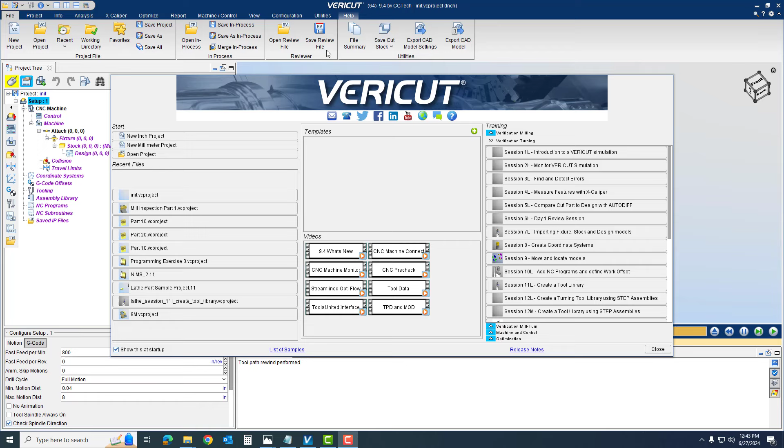So when I first open up Vericut, I'm going to come up to my welcome screen. If you ever need to get to the welcome screen after you open it, you just come up here to your help tab. We're going to go ahead and start with a new inch project. And then we're going to start kind of like what we did in the last video. If you've already watched it, we're going to install our controls, our machine. We're going to go into our attachments. We're going to install a fixturing. We're also going to install our stock and our design, so our part model.

We'll go ahead and do our coordinate systems. We'll add the G code. I'll show you how we're going to introduce a master tool list, how to grab tools from that master tool list. And then finally, we'll go over the NC program. So let's go ahead and go to control. I'm going to show you different ways to do this as we go along. After I click it, I can click on the browse folder and you'll see me go to my desktop.

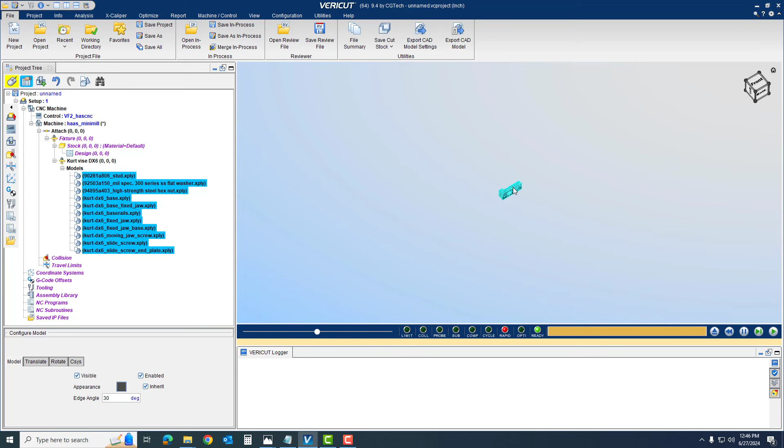Now when it first comes in, notice my orientation. When I first turned on my Vericut project, it's already in a certain orientation. When the models were saved by the designer, they were saved at a different orientation. It just doesn't matter, okay? So what I want to focus on first is getting this to the same orientation as what my machine is located in, because I want my spindle to come down on top of my part.

I don't want it trying to come up through the bottom of the part. So do not try to manually rotate this with your mouse. We're going to actually go into Kurt vise. We're going to rotate it. I'm going to change this to 90. And then I'm going to just try to get it to the right way.

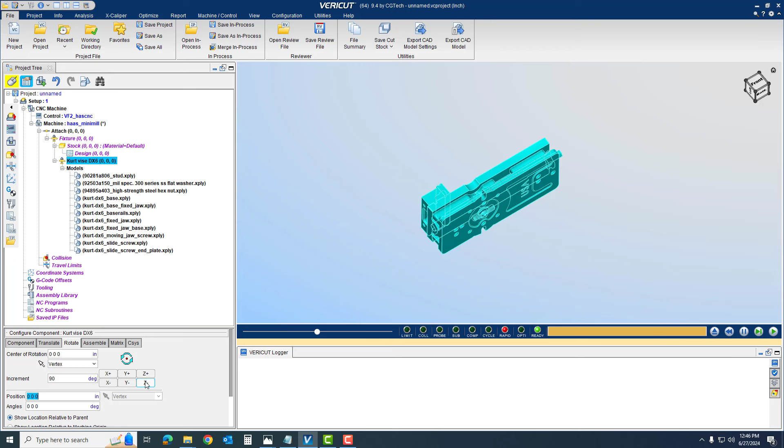So that looked good, and that looked good. So you'll notice the orientation looks just like this right here. Okay, so if I was looking straight down on top of it, that's what I would want right there. So I'm going to click off of it, and I'm going to go ahead and minimize. That was probably half the battle right there with our fixturing.

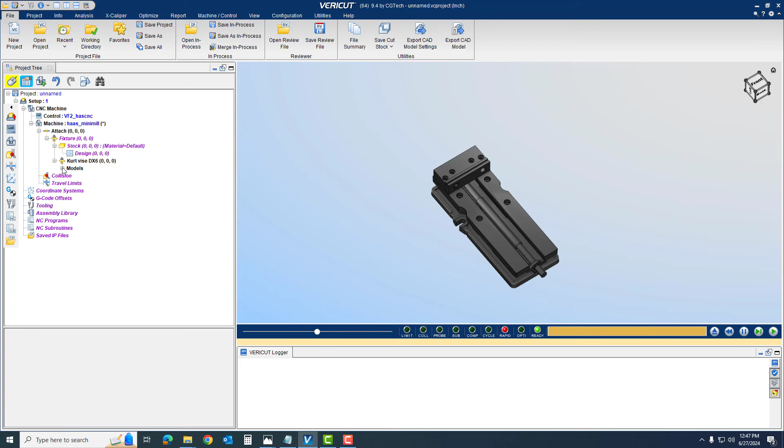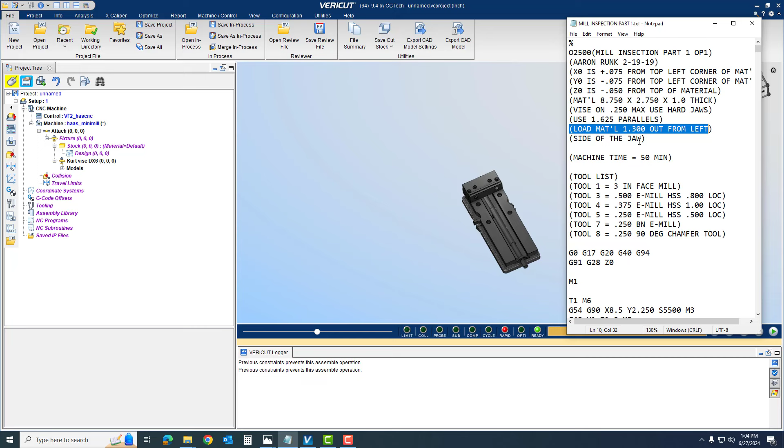So now we're going to come up and we're going to make our stock, but before we do that, let's come up here and see what we're going to be making. So my material is going to be 8 3/4 by 2 3/4 by 1 inch thick. We're also going to vise onto a 1/4 inch max with our hard jaws, and we need the material to be hanging out of the left side of the vise 1.300. So we're going to go ahead and do that right now.

So I'm going to click on stock. I'm going to go to component. I'm going to come down here to model, and I'm going to click on block. Now when this comes up, it's just going to put some material right there in the middle. I'm going to go 8 3/4, and I can hit tab or I can click on the next line, whichever one you prefer. I'm going to hit 2 3/4, tab, and then it's already set to 1 inch, and I can hit enter or whatever I need to do.

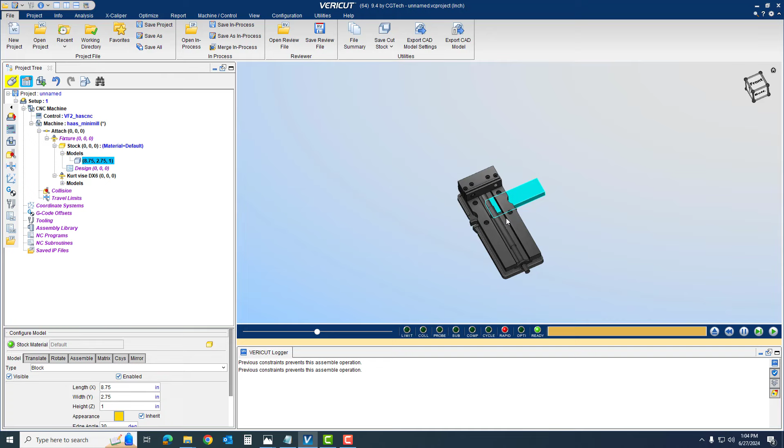So now that is actually right where we need it to be orientation wise, so we don't need to rotate our material. The next thing we're going to do is we're going to use the assemble function to kind of mate it against the right surfaces, but we need to kind of move it close. I find it's a little bit more helpful to do that. So in translate, I'm going to go 5 inches. I want to go up 5 inches.

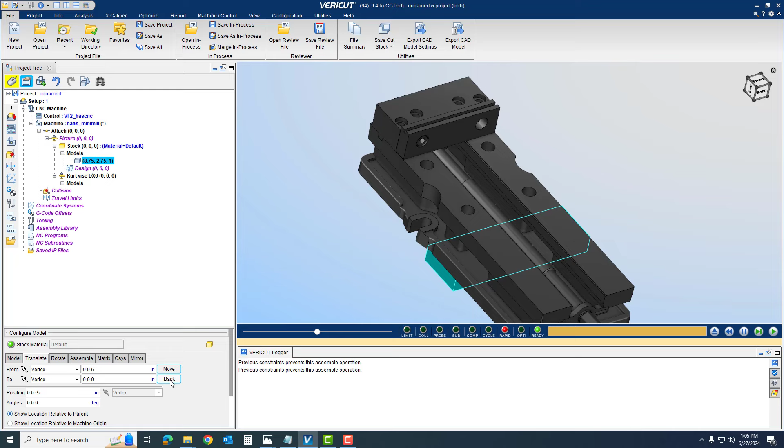So I'm going to hit move, but if you'll notice, it went the wrong way. So if it does this to you, you can simply hit back, and then we're actually going to move it minus. So the way Vericut is incorporating this, it's thinking that's moving in a plus value. It gets kind of backwards. You can't always get it right the first time, but that's okay. That's why that move back or reset is right there.

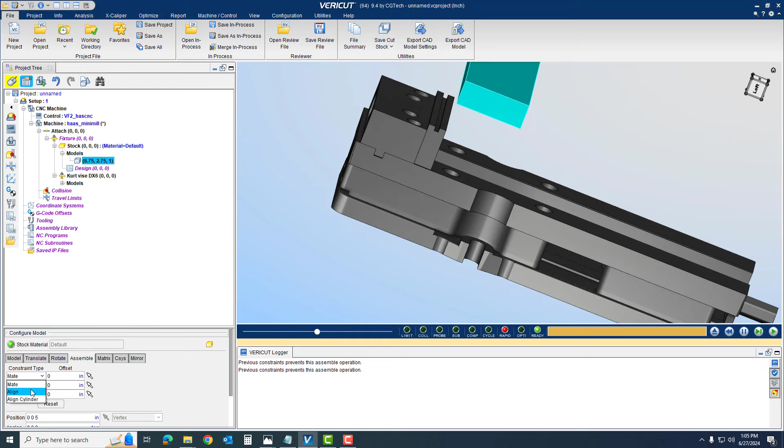So now we're going to go into the assemble function of this, and we're going to keep this in the mate. We have different constraint types. We'll use align here in a little bit, but we're going to go with the first one, and we're going to simply work on getting the bottom mated to the top, and then we're going to lower it a minus 250 thousandths. And I want to hit enter. I want to watch it. You can see it did go the right direction. So that worked out pretty good.

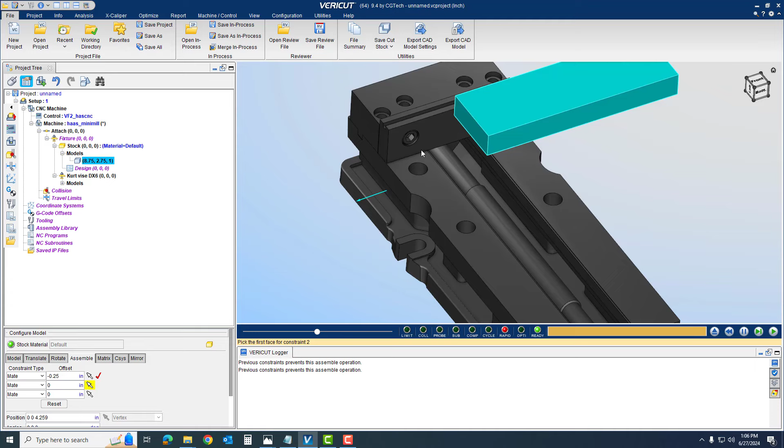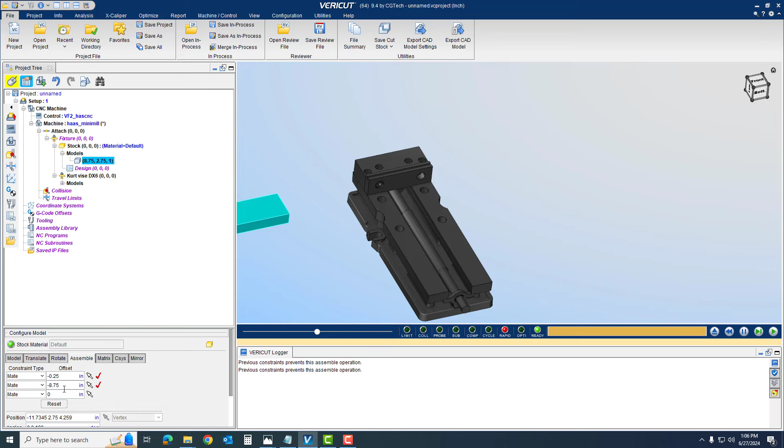So next we'll go ahead and hang it out 1 inch 300 thousandths. But when I mated it, it kind of flipped it. It's kind of annoying, but it's not a big deal. So to fix it, I know my material was 8 inches 750 thousandths. And if I hit enter, it moved it, but it went the wrong way. So I'm actually going to put it in a minus and hit enter. And you'll notice that it did go the correct direction, but it's flush.

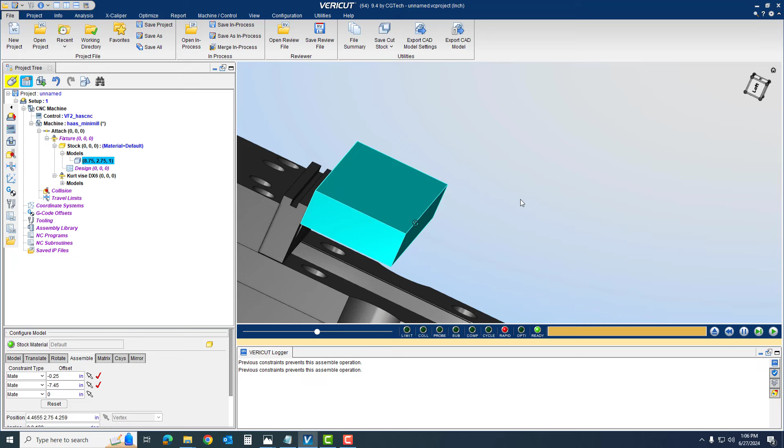So I'm going to let this software do the math for me. So I'm going to type in plus 1.3 and hit enter. So it was actually a shift of 7 inches 450 thousandths in the negative. So that looks pretty good. The last thing I got to do is I got to get it flush with my jaws. So I'll come here to the last one, click on that surface, click on the face, and everything looks really good. So right here, I have my part positioned in the correct location. I am now ready to add my moving jaw so that we can get it to clamp on my material.

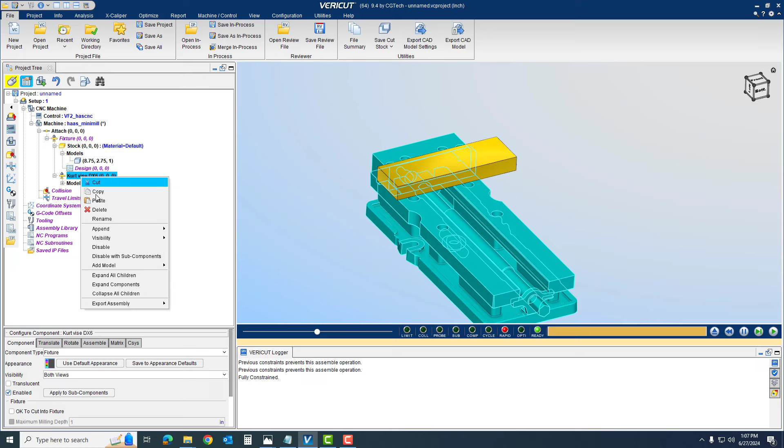So I'm going to come down to here. I'm going to right click on the Kurt vise. I'm going to go to append, and I'm going to put another fixture that carries the same alignment as this one, so that way there's no aligning once you get it in there. So I'm going to rename this as movable jaw, hit enter.

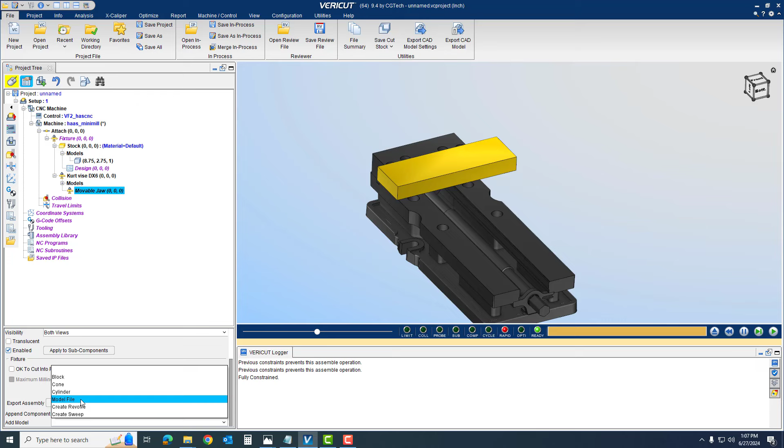I'll come down here to the model, and I'm going to go from model file, and then I'll do the same thing. I'll come back to my Vericut. I'll go to my Kurt vise, and this time I'm going to get my movable models. I'm going to do the same thing. I'm going to grab these XPLYs right here, and I'm simply going to hit OK.

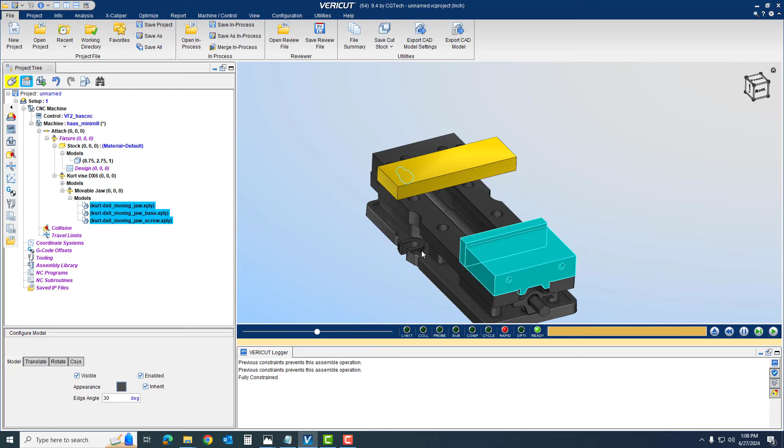So you'll notice it kind of brought an extra screw in there, which is kind of odd. It's all right though. It's not a big deal. And I'm going to go ahead and click on that one screw because I don't need it, and I can just delete it right there.

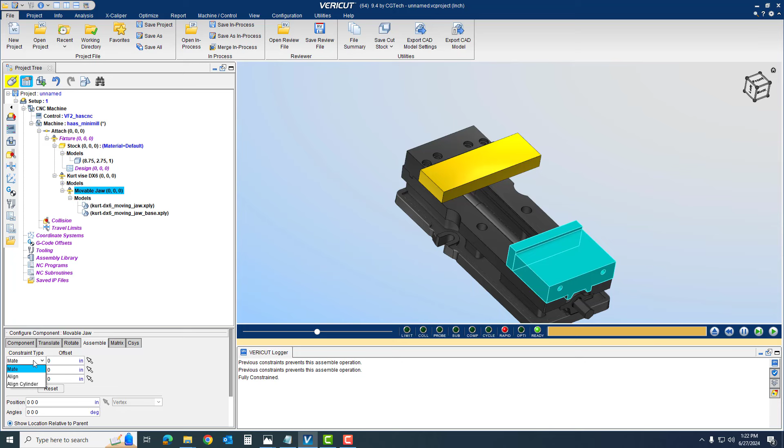So now let's go ahead and get this movable jaw flush with my material. I will click on moving jaw. I will go to assemble. I could go to align, but we've done mate so far, so let's go ahead and do that. I'll click on the arrow. I will click on that surface. I will click on that surface, and if I click out anywhere out here in space, it just takes it off from being highlighted. So this is really cool.

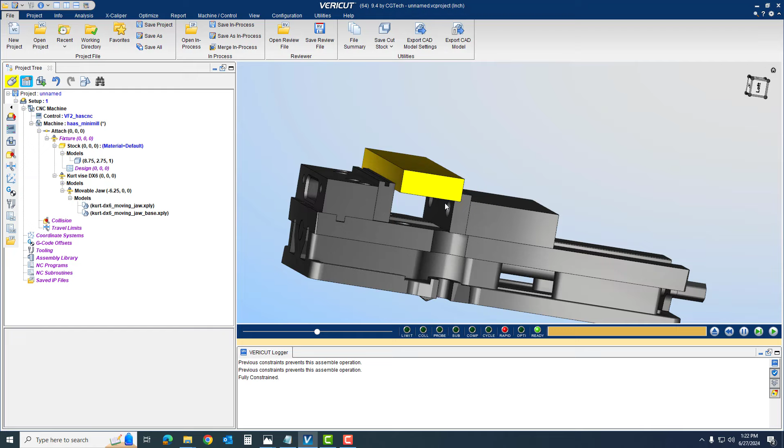So I have everything. If you wanted to, you could build in some parallels right here. Just kind of give you a more realistic idea, but this is just keeping it pretty basic. The next thing that I think everyone's going to like, this pretty cool little customization, is maybe I don't like the color of the vise right here. Maybe I want to look a little more realistic.

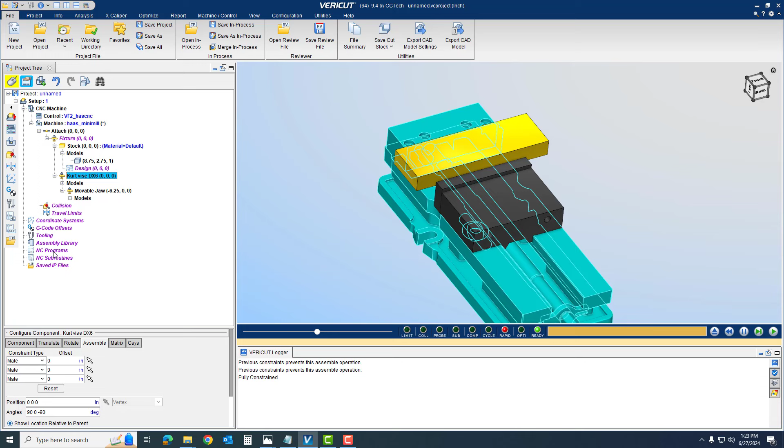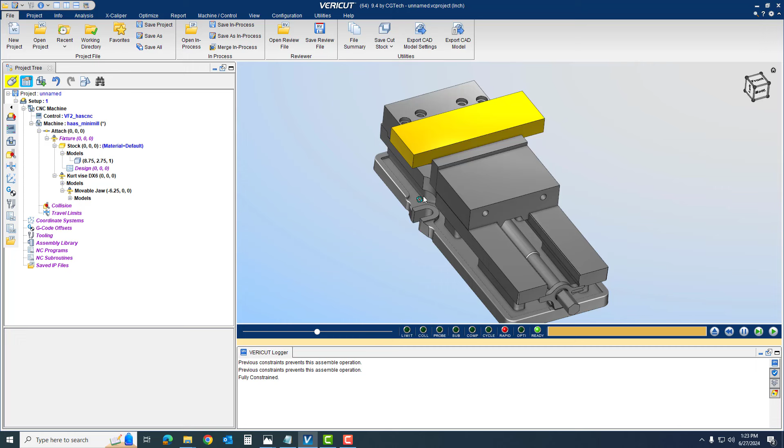So what I'll do is I'll come down here to component, and I can go to appearances, and let's change it to something a little bit more realistic on the steel scale of it. And then I'll hit OK, and let's say this moving jaw, let's make it match. So we'll go to the same thing, hit OK. If I wanted to, I could grab that bolt, and like I said, I want to change just that one color of that bolt.

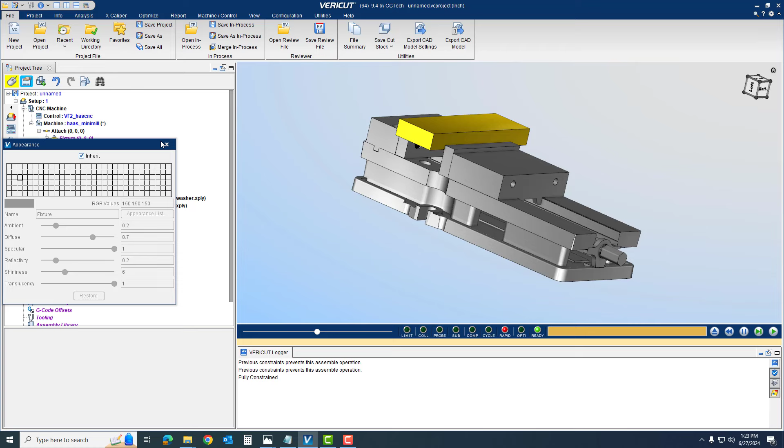I could also go to model, it has an inherited color, so I'm going to click that off and we'll just make it a darker color. See it right there. And then if you know what vises look like, this bottom area is going to be blue. So I just kind of exited my box right there and I clicked on that. Same thing, click off inherit, and then I'll go to blue right here, and then I click off of there.

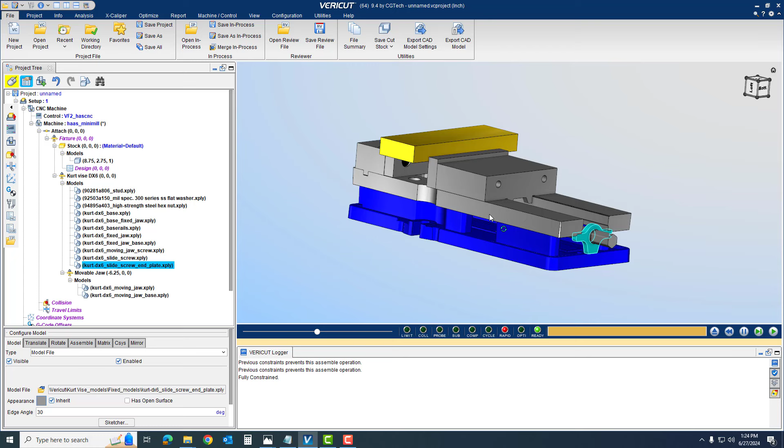So it's really cool. You can customize this. You can change every single component of this vise to a different color if you'd like. It's just whatever you feel comfortable with doing. So now let's go ahead and get rid of our vises right here. Let's just minimize our drop down menu. Now it's going to be very similar to how we did our last video.

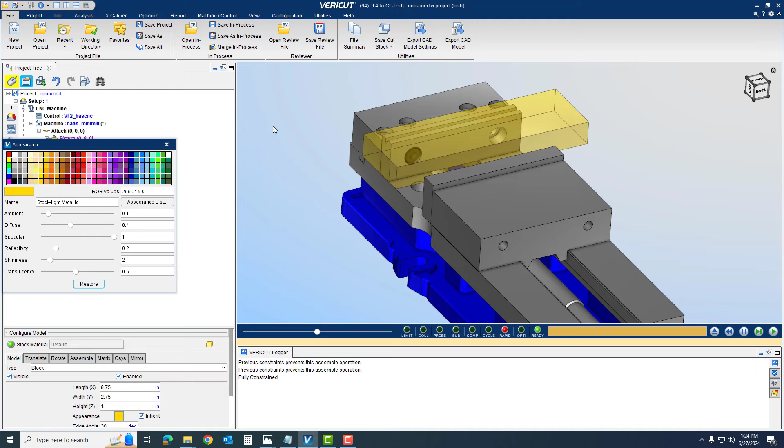I'm going to click on my material. I'm going to go to the appearance of it, and I'm going to make it a little bit translucent, so 0.5, and hit enter, because when I bring in my model I want to see everything. So I'll exit that. So now is when I'm going to go to my model and my design. Now when you click on design, it's going to come up as invisible. So you want to make sure it's visible in both views.

We're going to go into adding a model file. And I'll go ahead and again, this is where my model file is at. So I had a stock, so you could bring in a stock and then position it, but the block worked out just as well. So here's my model. I got it as a .x_t. You can do a SolidWorks part.

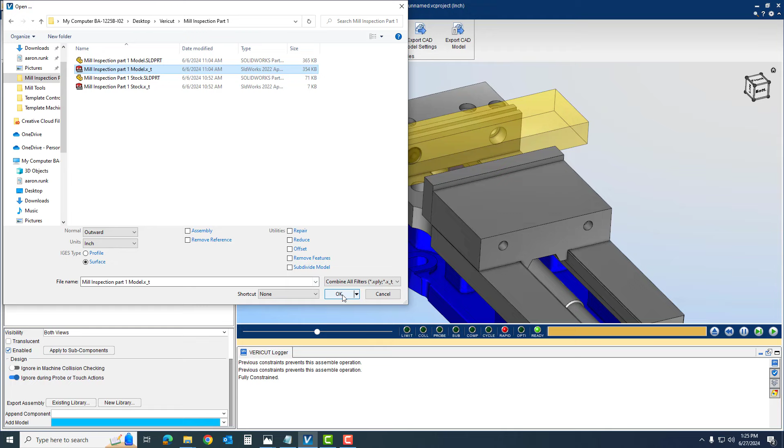Sometimes the SolidWorks, if you have it and the license with Vericut, don't seem to make that handshake. So I'm going to go ahead and use a .x_t or a Parasolid. I'm going to hit OK, and it's going to bring it in pretty much in the same location it brought the material in. And I'm going to follow kind of the same pattern I did before.

I'm going to go ahead and translate it up. And then I'm going to go to Assemble. And here's where I'm going to go over the aligning. So I'm going to change all these to align. There's not a lot of difference with the mates, but I'm going to go ahead and change them to align.

Now I want to look at my information here. Now it says XY0 is 75 from the top left corner, and then X and minus 75. Now here's what's kind of tricky. You have to take your time on this. Now if you look right here, when I went into my CAM software, my XY0 for my coordinate system is the top left corner. Now I moved my model in from that corner 87 thousandths and 50 thousandths right here.

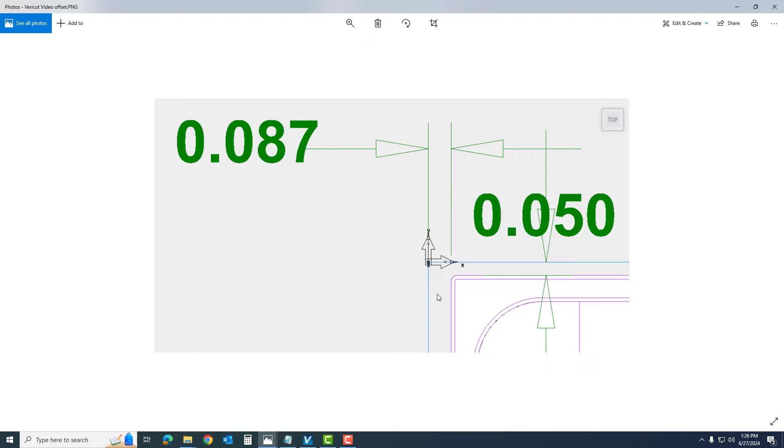So that is what I'm going to be moving my material from that corner. So we're going to align it with that corner, and then we're going to move it over and over. Now it is flush with the top, so I'm actually going to have to move it down into the part for that. Now that's going to take a little bit to sink in. It really depends on how you make it in your CAM software, but let's go ahead and do that right now. So that 75 thousandths that we were looking at, that's not going to have anything to do with how we're modeling it right now.

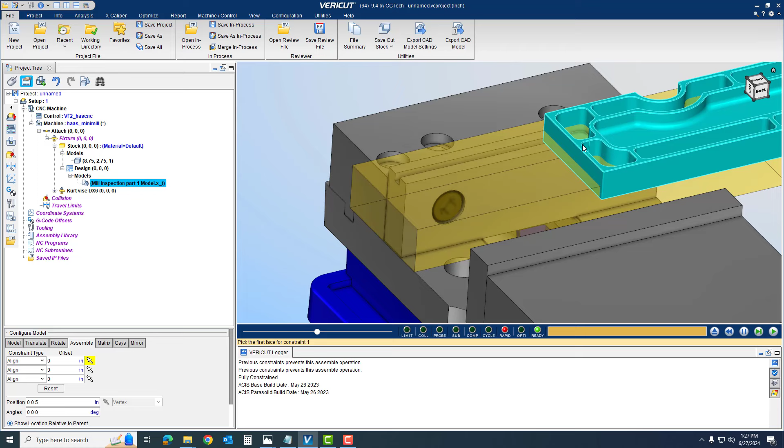So let's go ahead and do our first aligning. We'll go ahead and grab this and move it to there. And then again, it was 87 thousandths. So 0.087. If I hit enter, hey, it went the wrong way. So I'm going to go ahead and put that as a minus and hit enter. And you see that it does go the correct direction.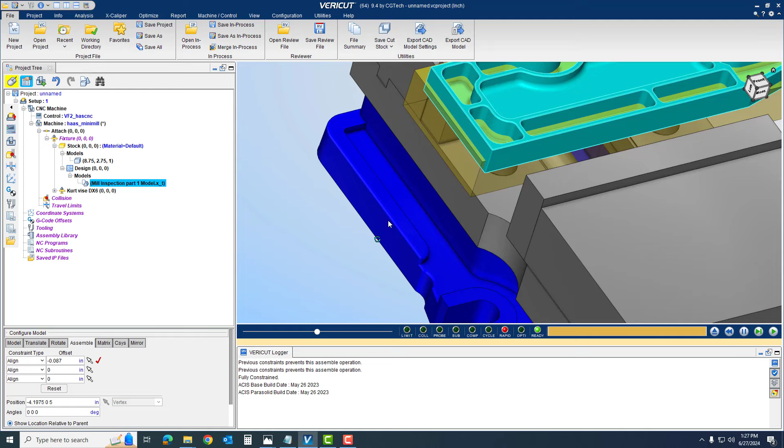And now I'll go ahead and I'll click for my other side, which will be this side of the part to this side of the stock, and then we'll put a minus 50 thousandths in here, see if it goes the right direction. It did. Kind of hard to see. If you need to, you can rotate it to see that it is going into the material.

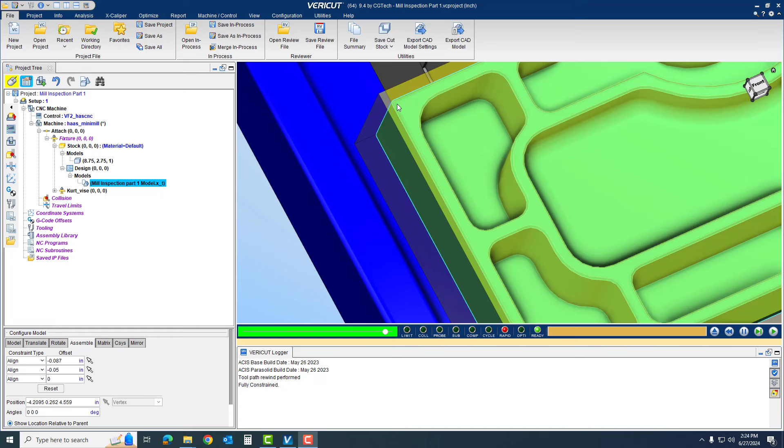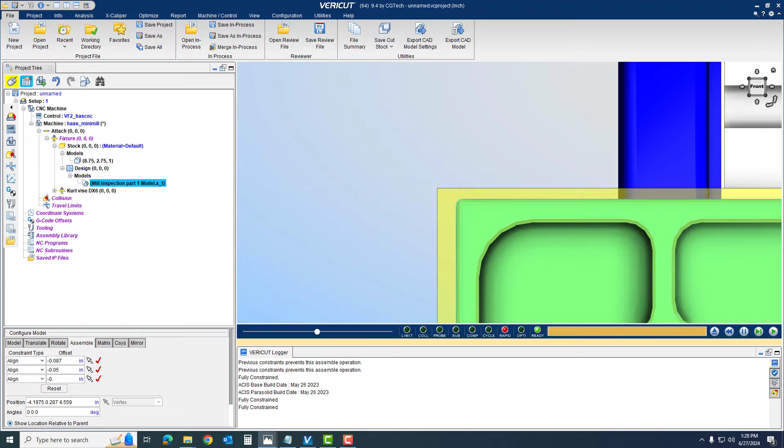And then the last one, we'll click the top of our part, top of our stock. Now I'm not going to move this down 50 thousandths because whenever I made my CAM software, I kept this flush with the top of the stock. So now we went through the aligning constraint type for positioning our part so that, if I go top, you can hold the middle mouse and you can zoom on stuff. So if I bring in this image, you can see that it does look very similar to that. And that's what we want.

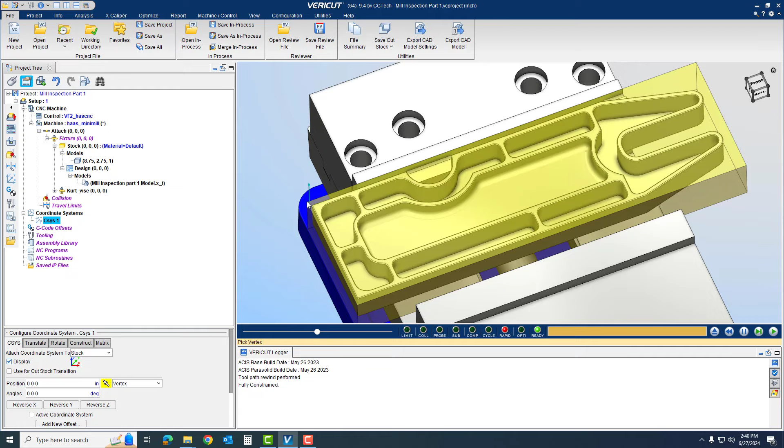So from here, I'm going to go ahead and add my coordinate system. I'm going to zoom out a little bit so it's easier to see. Click on my home button. I'm going to get rid of all that ladder so it makes it a little bit cleaner over here. Now remember, in my image right here, my CSYS is the corner, so I'm going to keep that in the corner. So I'm going to add a new CSYS, and it's pretty easy. I'm going to click a vertex, and I'll click this corner. I'll zoom up a little bit.

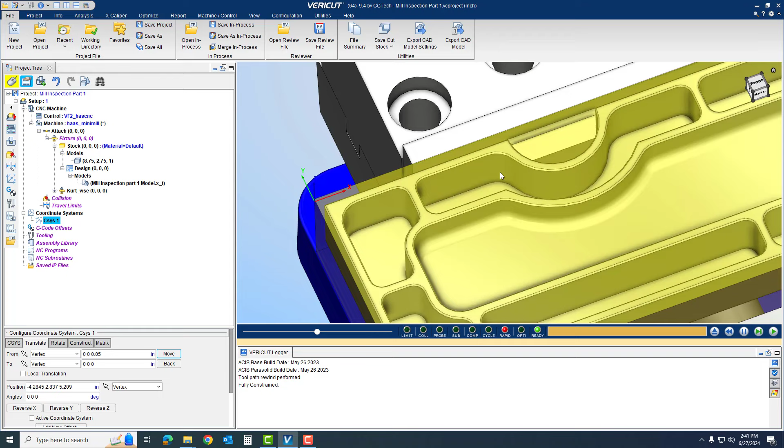Now remember, in my CAM software, I moved the model into the part, but I kept the face of the part flush with the stock. So in here, I will need to lower this 50 thousandths. Now see, it did go the opposite way, so I'm going to move it back. I'll take out that minus and I'll move it down. That way Z0 will cut at the top of this face. And then I'll simply just click off of it.

But now my program uses a work offset of G54. So we're going to call this 54. And then I'm going to go off the CSYS location number 1. And then I'm simply going to click add. So now I have a coordinate system right there. So that was really easy.

Now the next part is we're going to add the tooling. Now I'm going to spend a little bit of time on here because this is where you're going to have a lot of questions.

So I'm going to double click and bring up my tool library now. In my last video, we went through and built every single tool.

I don't want to do that because if you'll see here, I've got a face mill, several end mills, ball noses, and a chamfer tool. Now what's interesting is these 4 tools, one's a 1/2 inch, one's a 3/8, this is a 1/4 inch, and that's a 1/4 inch. But in my tool inventory, all of these tools have 3/8 shanks. Very interesting, but that's how I have it.

So I can actually use the same tool holder for all 4 of these. I'll only be grabbing a face mill, 4 of these style holders, and 1 1/4 inch holder. That's going to make it a lot easier, especially because we have access to a master.

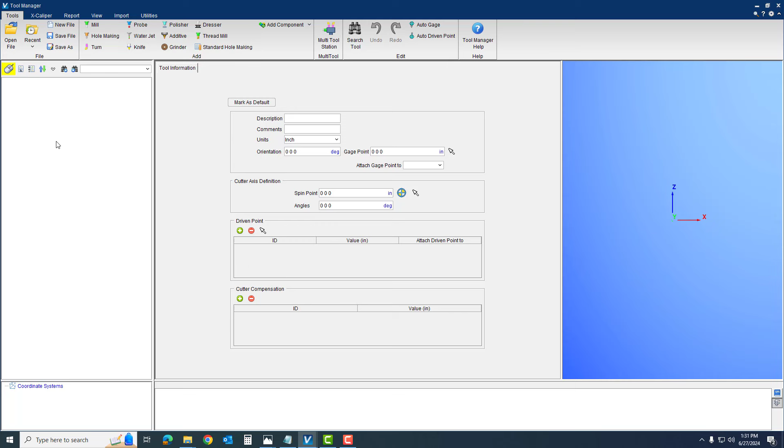Let's go ahead and minimize that. Right here, I'm simply going to right click and search for tool. I'm going to go into this looking for browse, and then I have mill tools, which I'll include in the description below. I'm simply going to click on it.

So now it comes up with this master tool list that I've already made. I'll kind of move this over so you can see. Now this is the brand. This is a Cat 40. I have some BT30s in there for different style machines. I have a mild description of what's in these holders.

Now you can build your holder library without adding a tool. I just happen to add the tool in there so you can get an idea. This is a Cat 40 holder. It's got a 2.5 inch gauge length and it can hold a 3/8 shank. So in the picture here you can see it has a 1/2 inch tool with a 3/8 shank.

So I'm actually going to need 4 of these. I'm also going to need a face mill, which has been designed already down here, and we can go in there and change this diameter if we need to. I'm also going to need this 1/4 inch, which by default had a 90-degree chamfer tool. I got kind of lucky there.

So let's do this in order. I want that face mill. I'm going to simply click duplicate. And if you'll notice up here, it brought that tool into my new library.

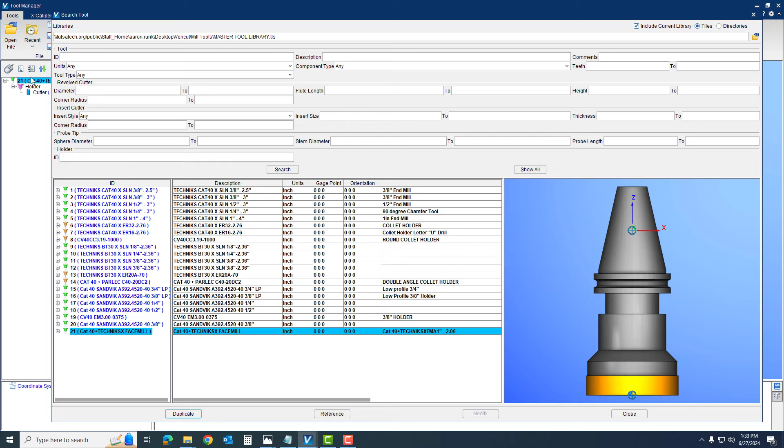So let's come up here to this tool right here. Like I said, these are the same things. One's a 2.5 inch, one's a 3 inch. So maybe I want that extra clearance right there. So I'm going to grab 4 of these - 1, 2, 3, and 4.

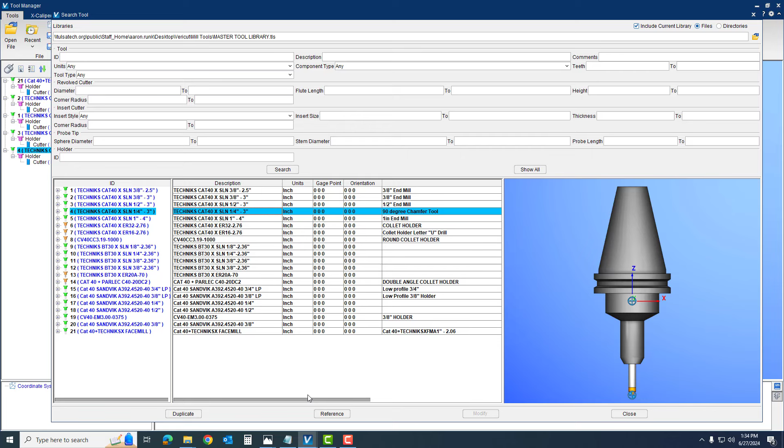We'll grab our 1/4 inch and we'll duplicate that as well. We are now done with this right here, so I'm simply going to close it. And there's a lot going on right here.

So the first thing I'm going to do is minimize this so we can take our time right here. I'm going to spend a little bit of time on this. If you're already familiar with how to do this process, you can skip ahead. But I want to make sure for those that do not understand how to do this part that I cover some of the basics when it comes to doing this.

So let's start off with our face mill. The first thing I want to do is rename all these tools. Now, sometimes with the renaming, I'm just right-clicking, renaming, and hitting enter after I rename it. I'll show you why, because it can get real frustrating whenever you're doing it and you have multiple tools with the same name. This really helps me navigate this a little bit better.

So let's start with the first tool. It is a 3/8 or 3 inch face mill. So if I come up to here, it's tool number 1. So I'm going to right click, hit 1, enter.

Also very important, as soon as I do that, this has to be a 1 as well. Think of this as your H and that is your T. So your T and your H have to match or your simulation will not work. So if I drop down to the holder, you'll see that I've created a DXF.

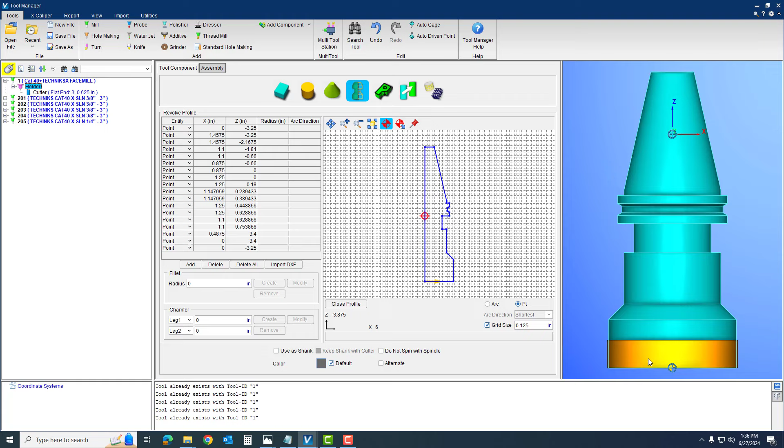Now there are ways of building inserts. I actually went the simpler route. I went to the cutter and just made a really fat end mill. So that's a 3-inch end mill right there. You can put a radius on there, but it is a flat 90-degree surface. Works out just fine for what I'm doing because I'm facing.

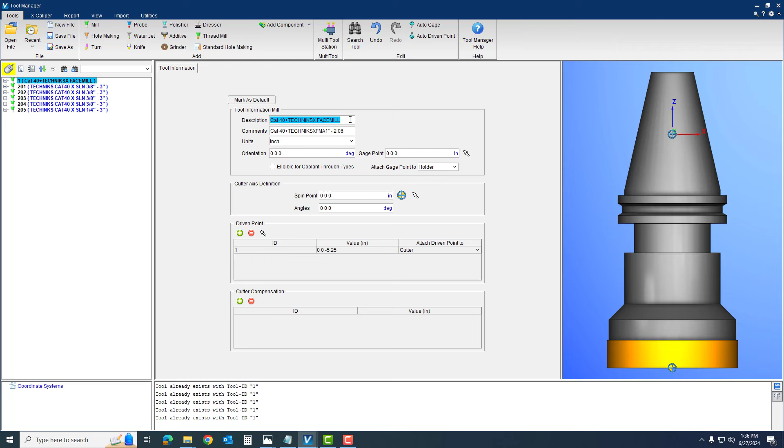So that tool's done. And if you wanted to, you could change your descriptions to whatever you wanted to. And when you're done, always hit enter and it will save it over here.

So tool number 2, if I come up to here, is going to actually be tool 3, a 1/2-inch end mill with 800 thousandths length of cut. So I will simply come up to here, right click and rename to tool number 3. I'll hit enter, come down to here, hit 3, hit enter. If you don't hit enter, it won't always save it.

Let's come to that cutter. You can see it's a 1/2 inch. It's got the 3/8 shank, and it's already at 850 thousandths. But let's change that. Let's take off that 50 thousandths and hit enter. Let's look over here - see, it just made it a little bit shorter. That's all it is right there, is change that right there.

So let's go ahead and close that one, and let's just keep going. So I got the next one. It is tool number 4. It's going to be a 3/8 with a 1-inch length of cut.

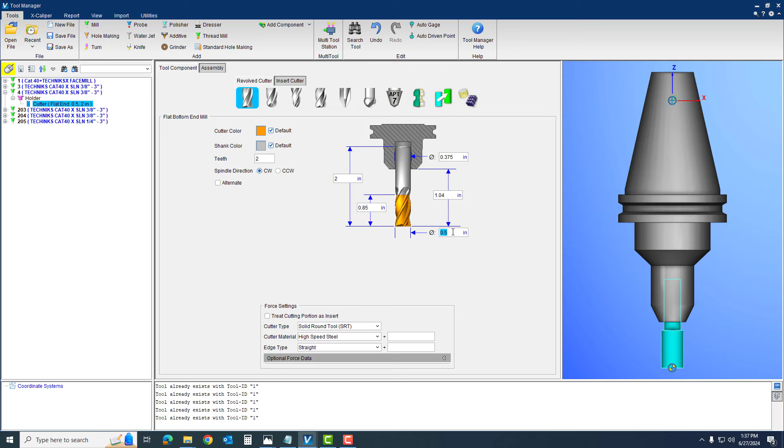So let's come here. We'll rename it to tool 4. We'll change the value down here to 4. And then we'll go right to the tool, which is going to be a 0.375. And it says it had a 1-inch length of cut. And I click off of it, and you can see that there's just a little bit of flutes hanging out.

And if you install your tool and it's sticking out longer, I can simply come up here and make that 1.25, and you can see that the tool is hanging out just a little bit more. It's up to you on how you want to do this part.

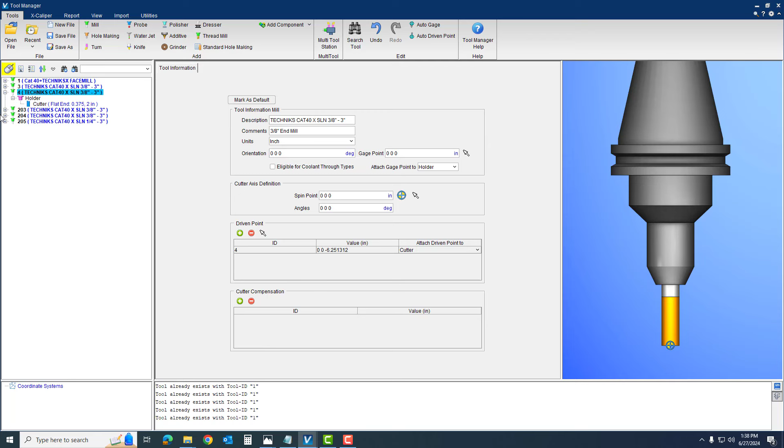So that tool's done. The next tool is going to be a 1/4 inch. The next 2 tools will be 1/4 inches, but one is a ball nose and one is a simple end mill. Now my end mill is going to have to be longer than a 1/2 inch - that was just kind of a generic post in there, or else it will cut the tops of my part. So I'm going to change this to just 800 as well.

And we don't have to save anything, just to give you guys a visualization. I'll come back up to here to my next tool, right click it, rename, tool number 5. Come to here, make that a 5 as well. And then we'll go to the tool, and then we're going to make it 0.250. And then we'll make that 800.

Because a lot of times the end mills that I have a little bit of a taper here, and it doesn't always show that. And some of them are a lot longer - some of them are 750, some of them are 1 inch. I mean, it's just whatever you want to show in there. So that works out pretty good. We're not too worried about that.

And so the next one, we're going to go over here. It's going to be tool number 7. It's going to be my ball nose. So we'll right click, rename, we'll go 7, enter, 7, enter. Go to the tool - we're going to go to ball nose right here, and we're going to make it 0.250.

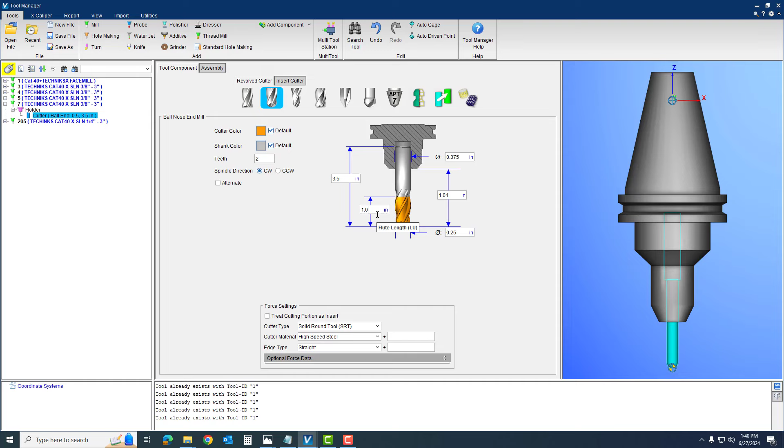And we'll go ahead and leave it like that. I mean, if I wanted to, I could change this to 375, and maybe it doesn't have that much length, maybe it has 1-inch length of cut, just like the other ones. We can make it look however you want to make it look, but it's always good to go out there, find the correct holder, install your tool into it, and set it up.

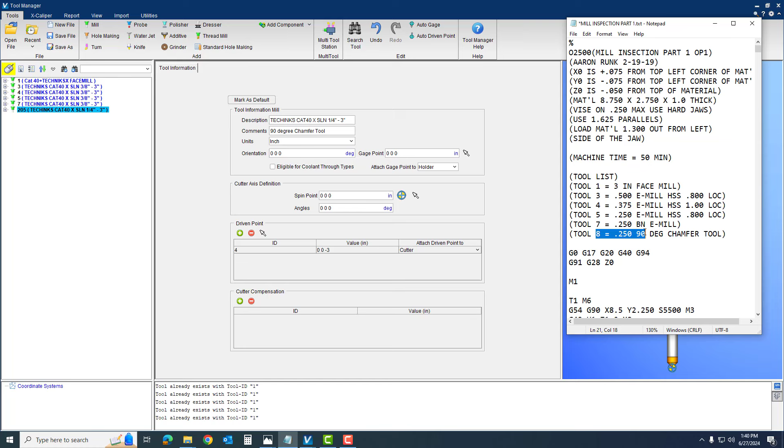And then the last one is going to be, I believe, tool number 8, and it is a 1/4 inch shank 90-degree chamfer tool that comes to a point.

So over here, we'll right click it, make it number 8. We're almost done. This is actually not taking as long as I thought. We'll come up to our cutter.

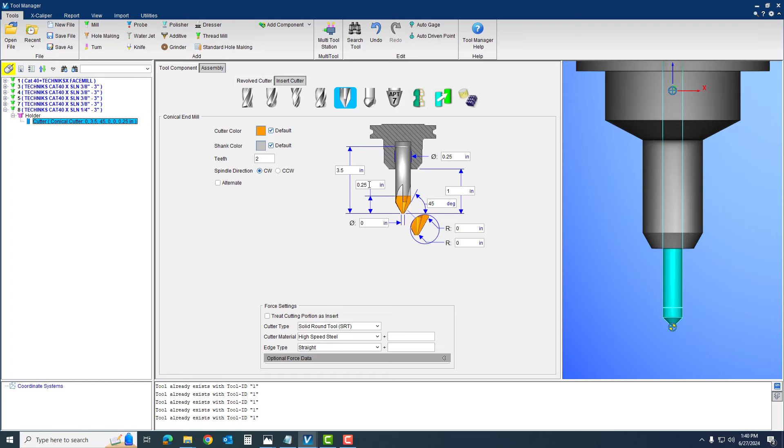I'm going to zoom up on it, and you'll see it already has a 0 radius at the corners. It's already what they call a conical end mill. I'm going to call it a chamfer tool, but you'll see I got a quarter inch sticking up in there, and I click off of it. That's just fine, it's just doing a chamfer on my part.

And so there we have it, we're all done. When I hit exit, it'll say, do you want to save? And I do want to save it, so I'm just going to go ahead and save it.

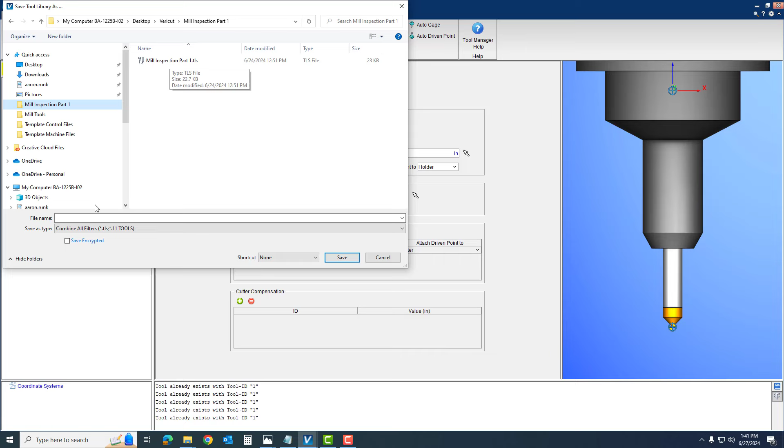We'll save it in here, not as my milling inspection tools, but I'm going to save it as my demo tools. So you can always save it right there, or you can save it as your new master if you don't have one. So I'm going to go ahead and hit exit right here. I don't want to save it, like I said, I was just doing that for visual.

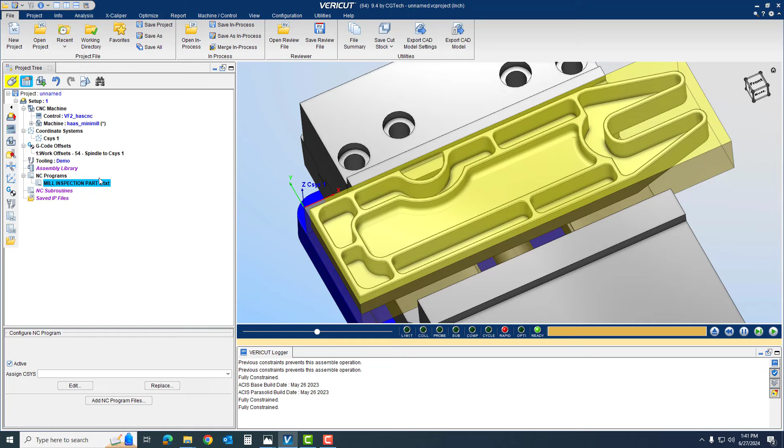And next thing you know, I am pretty much done. The last thing I have to do is go to NC Programs. I'm going to add the NC program, the one I just didn't edit, I didn't save it. I can double click it and you can see everything that we've been looking at is right there. And here comes the fun part.

We've built our material, we built our stock, we imported our fixturing, we got our orientations right. Ooh, here comes the nervous part.

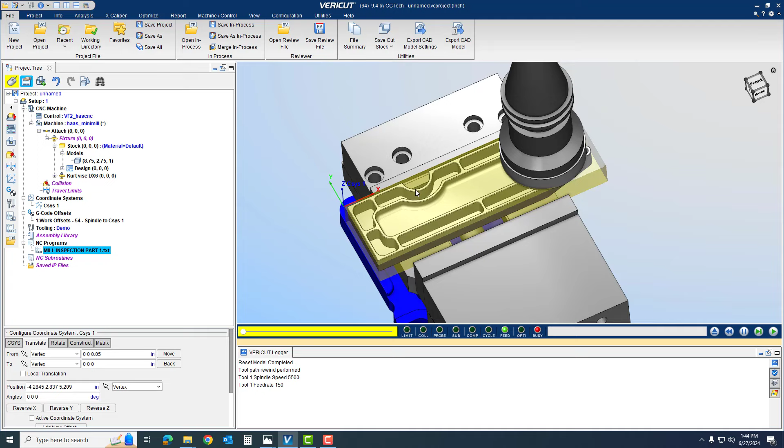Let's hit play. So you'll notice it comes in, it did face my material. It is going through the part, and we'll go ahead and speed this up a little bit. We can see that it's going through and doing the pocketing.

Everything looks pretty good. Like I said, it's a verification software, so we want to go ahead and run everything. We can see where the ball nose runs, the profile, the chamfer. That all looks pretty good.

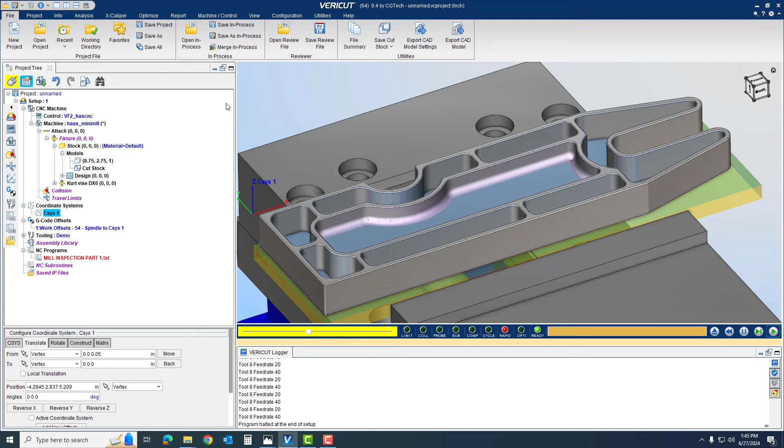Now the last thing, this is the cringe moment. I'm going to go to Analysis, and I'm going to hit Compare, and I should see nothing but clear. You'll see I got a little bit of graphics going on the face right here where the chamfer runs. Not a big deal, it did run it, we did see it cut.

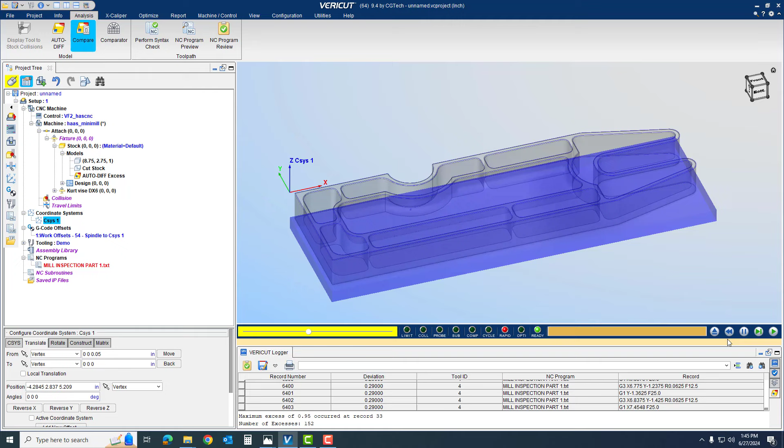So right here, this looks amazing. So whenever I set up everything, this is what I'm looking for when I go to send it out to my machine. Now keep in mind, I'm still going to set it up with these instructions for the operator.

Now the operator does this. There's plenty of this material around the stock for it to make a good part. But for putting this into Vericut and going over and making sure everything looks right, that's pretty much all we got.

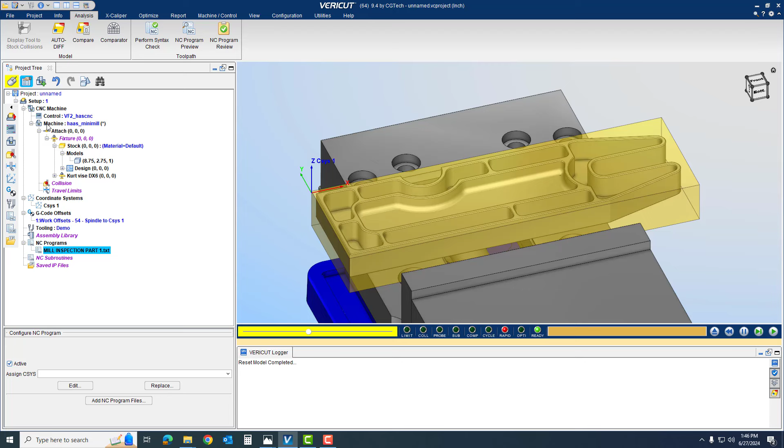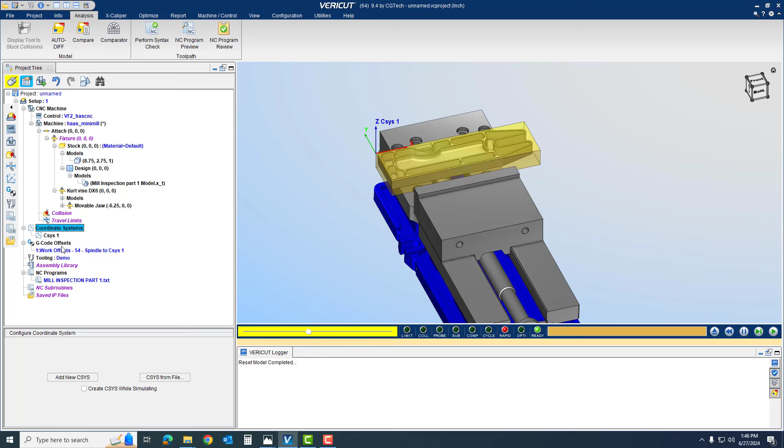So we successfully brought in our control and our machine file. We created our Kurt vise by installing a hard jaw and our movable jaw. We went through and made our stock, our model, our design model, and then we went through and created our coordinate system, our work offset. We were able to bring in all of our tools from our master. We loaded our program and we simply hit play.